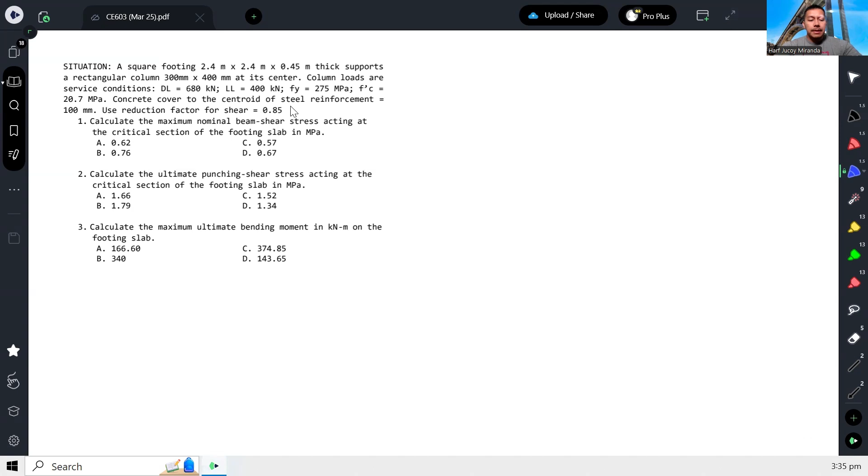In this particular problem, you have to notice that the reduction factor used is different, 0.85. This means the context is NSCP 2001, because in NSCP 2015, the reduction factor for shear is 0.75. So for this problem, we are using NSCP 2001.

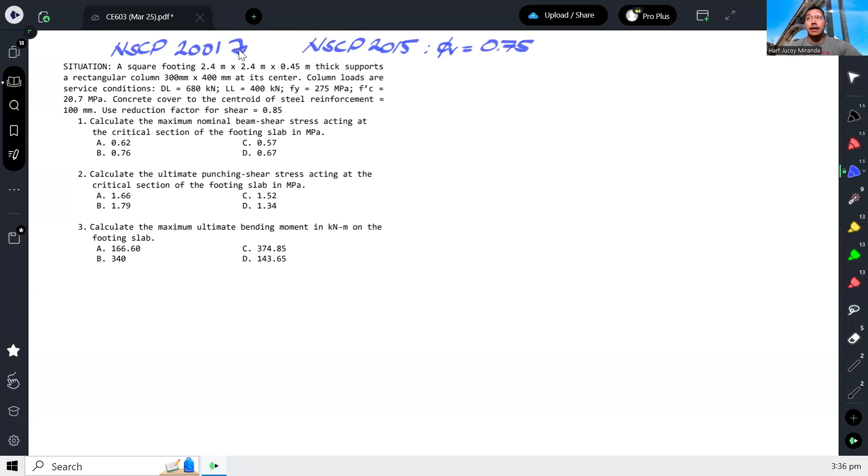The reason why I am still going from time to time back to the old code and the new code is because there are still questions in the board exam that pertain to the old code, so that we remain flexible.

Now, first question: calculate the maximum nominal beam shear stress acting at the critical section of the footing slab. Then calculate the ultimate punching shear stress, and then calculate the ultimate bending moment.

Because we are using NSCP 2001, our load combination would be 1.4 dead plus 1.7 live. In NSCP 2015, it's already 1.2 dead load plus 1.6 live load. Anyway, let's calculate first the ultimate load acting on the footing.

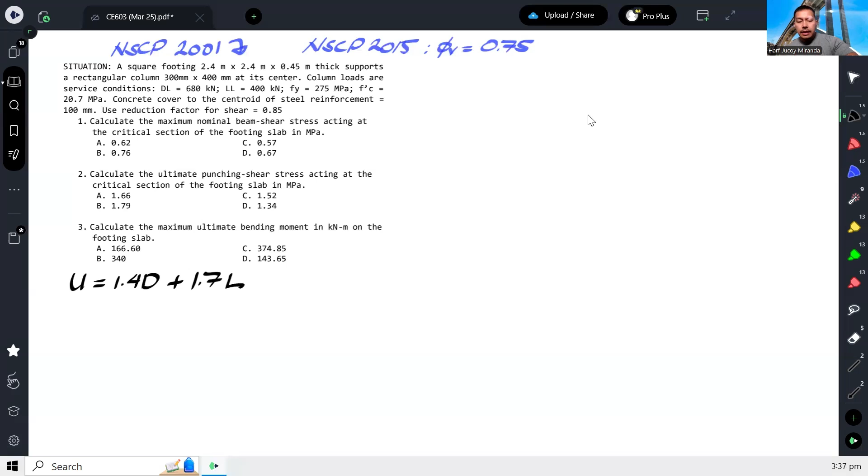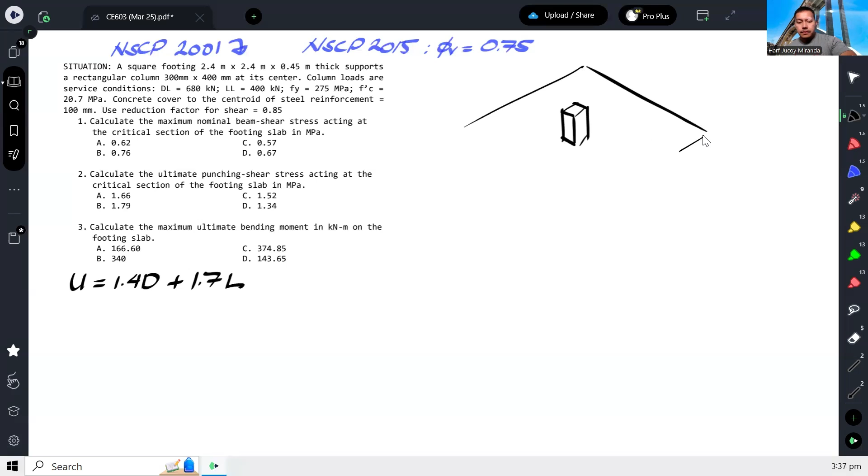So let's say this is the column, and this is the footing. Of course, there is an ultimate load acting on the column, PU. So let's calculate PU.

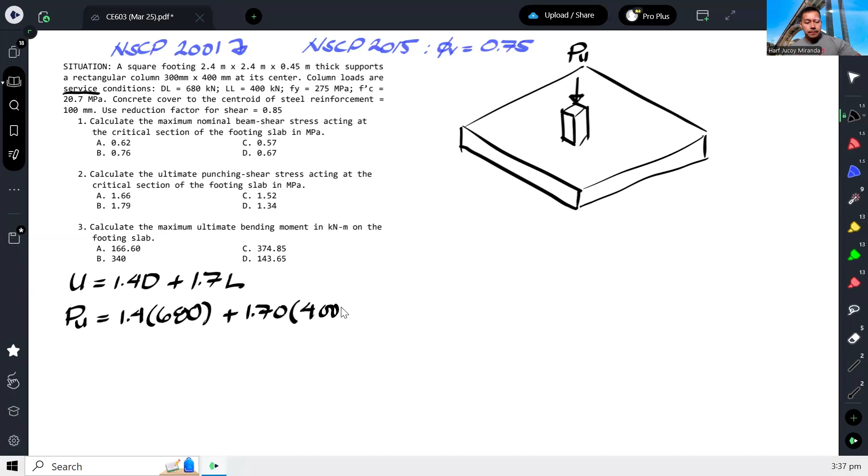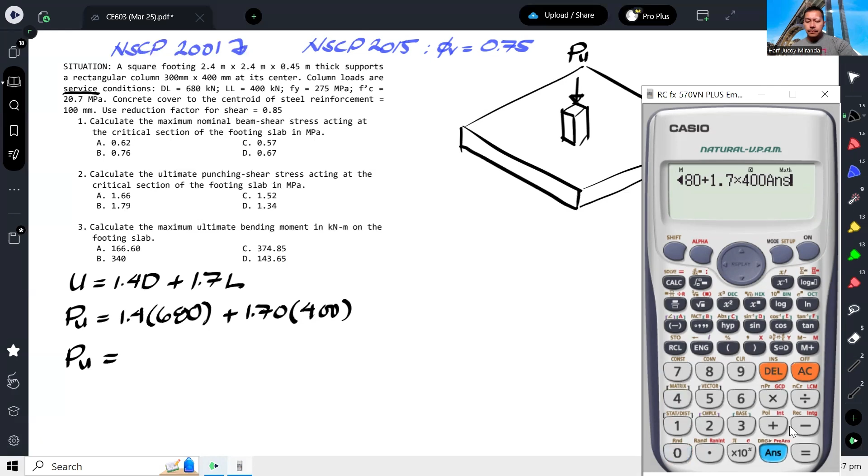PU is 1.4 of the service loads, since they are not yet factored: 1.4 times 680 plus 1.7 times 400. This is based on NSCP 2001. So 1.4 times 680 plus 1.7 times 400 gives us 1632 kilonewtons.

Alright, then we need the wide beam shear stress. The wide beam or nominal beam shear stress would occur at a distance from the face of the column. So if we look at the top view of our footing...

This dimension of our footing's column is 300 by 400, and then our footing is 2.4 by 2.4 meters. And we know that the critical section for beam shear stress is at a distance d from the face of the column.

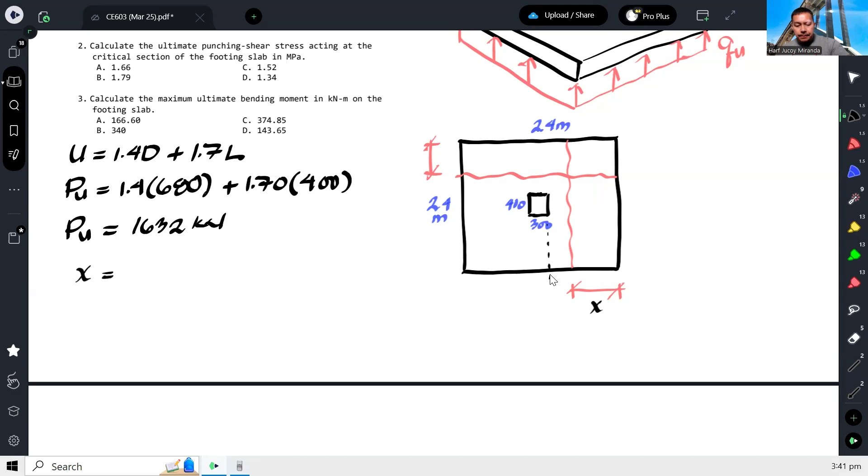Let's call it x. That x will be equal to... first, let's get the effective depth. The total thickness is 450, minus the concrete cover to the centroid of reinforcement, 100. So effective depth is 350.

So our x is 2.4, minus 300 or 0.3, then divide by 2, then minus the effective depth. So x becomes 0.7.

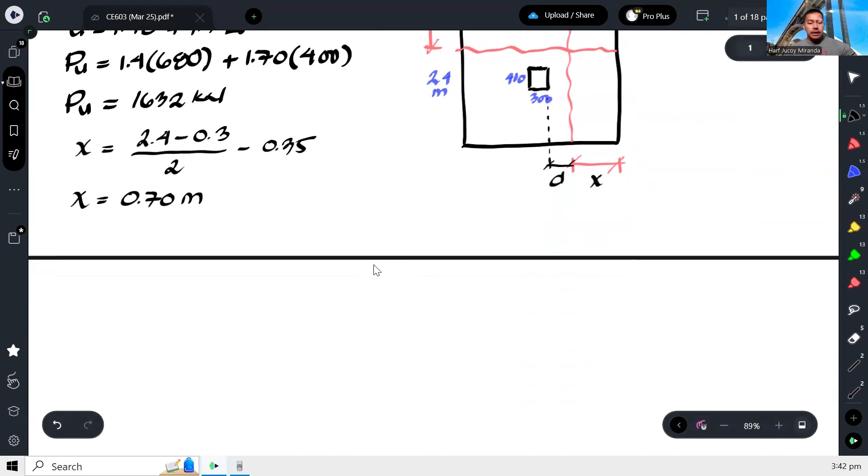So anyway, by getting this particular slice, we will now have a failure in this direction.

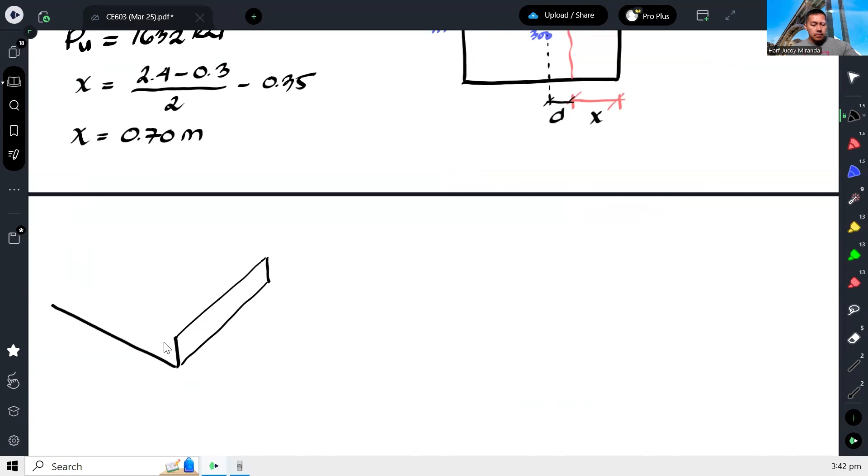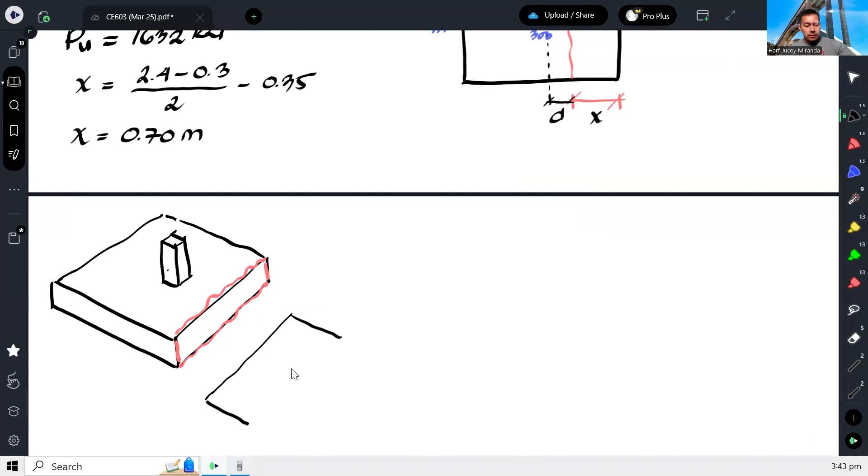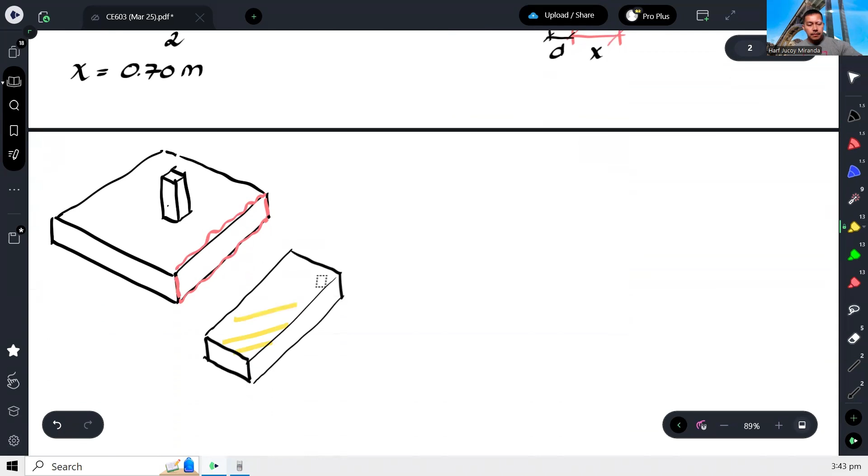Okay, so magkakaroon ng failure. So, itong part na to, nag-crack, no? Okay, so matatanggal to. Okay, so parang matatanggal itong part na to. Ito yan. Okay?

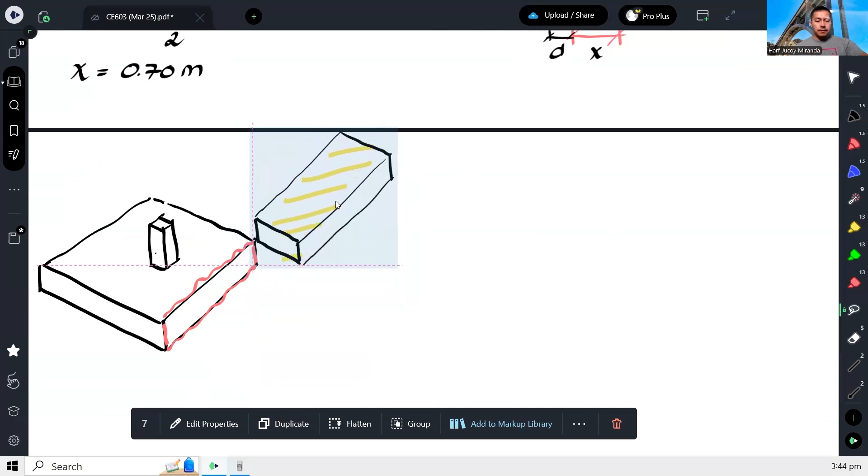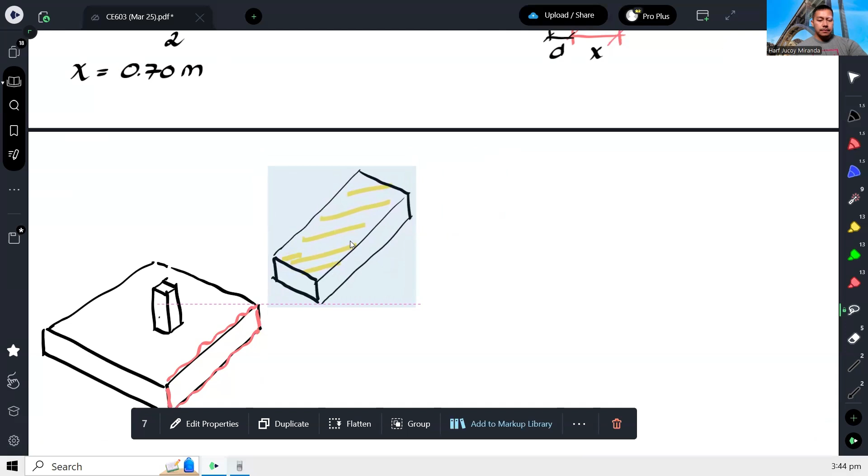So parang matatanggal ito, no? Okay, so parang maghihiwalay ito. Ito mahihiwalay dito. Okay, so naghiwalay sila dahil meron ditong soil pressure.

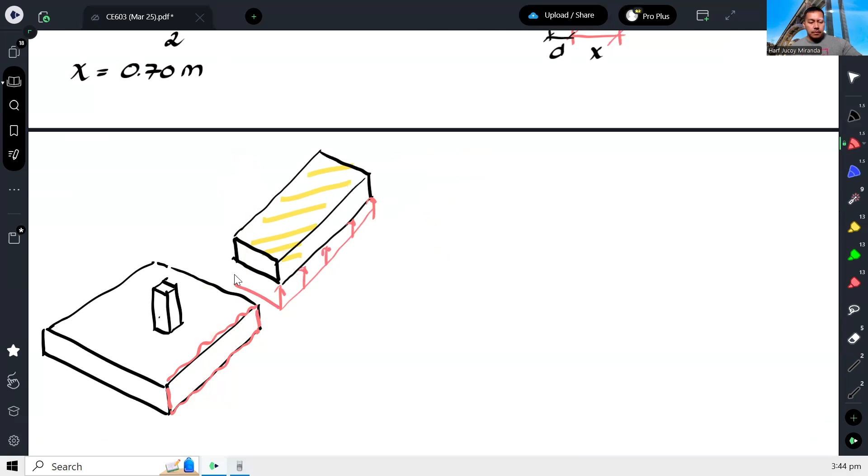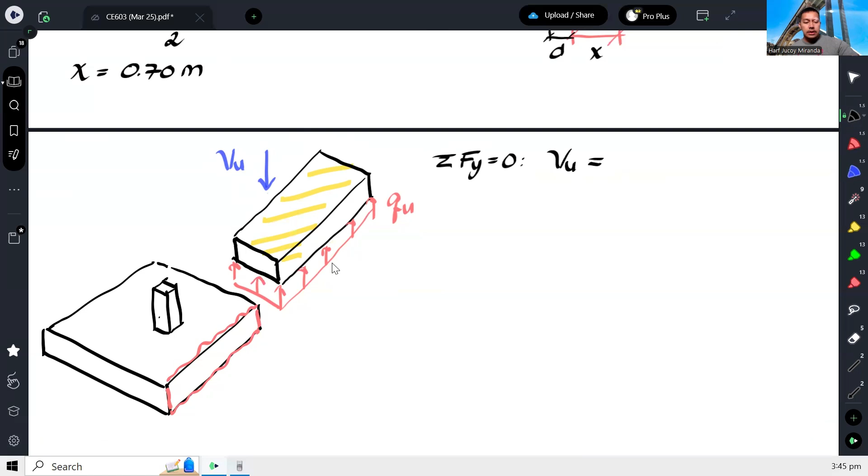Okay, QU. So basically, yung shear force acting doon, ito, kung ano man yung reaction niya dito. Okay, and yung shear force na kapag nag-summation ka lang ng forces para dito sa section na to, Fy is equal to 0. So lalabas lang dyan, yung shear force VU ay equal lang dun sa resultant nitong QU, which is QU times yung area dito sa ilalim.

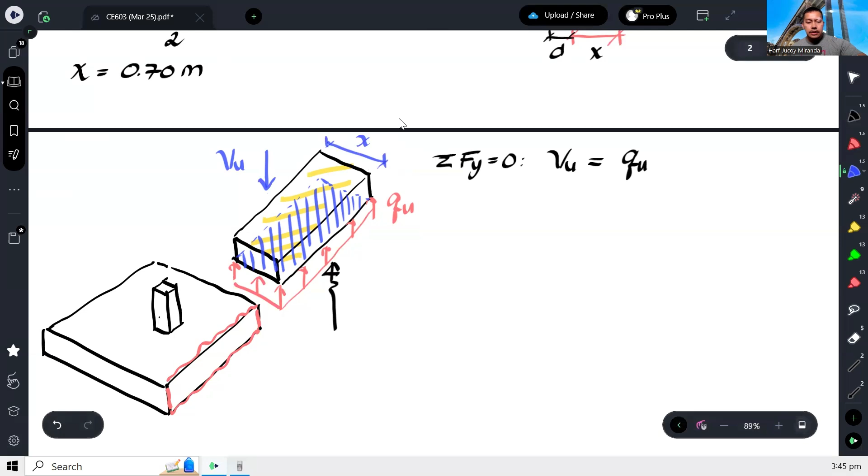Kasi di ba yung QU na yan, dito naka-act. Dito yan, naka-project sa area na yan. Okay? Wherein yung dimension na to, we already know that this is X. Ito yan. Okay, yung X na yan. Ito yan. Okay?

And then this length would be, that length is 2.4. Okay, so that would be 2.4 times X. Okay, so force na yan, no? So, therefore, ang VU natin will become, so kunin muna natin pala yung QU.

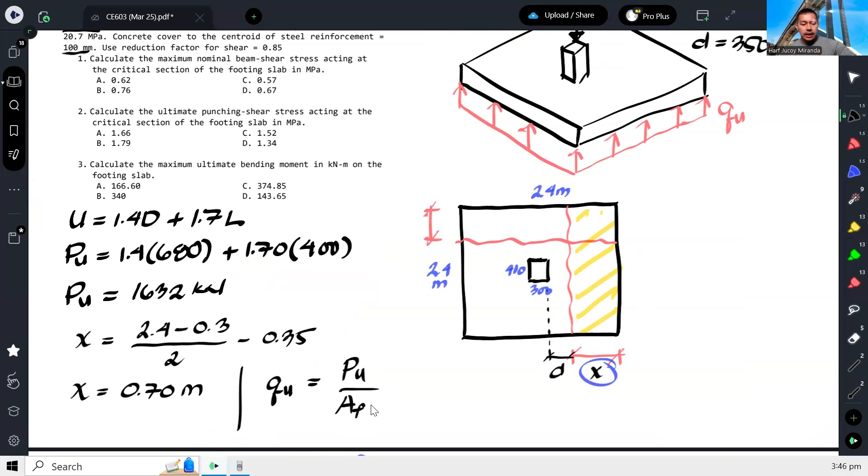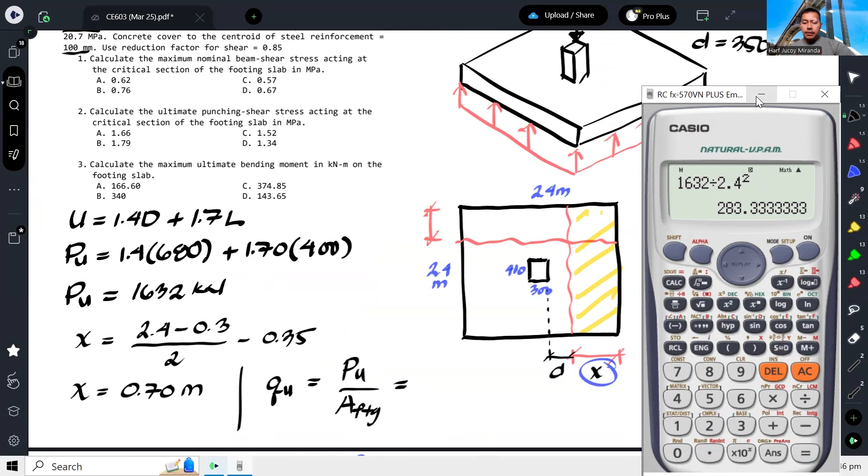Hindi ko pala na-compute yung QU. So, yung QU is just yung PU over area lang ng footing. Okay, and that gives us 1632 divided by area ng footing, 2.4 squared. Ayan, so 283.33 kilopascals. Store natin. Okay, so therefore, ang VU natin ay QU times 2.4 times yung X natin na 0.7. So, 476

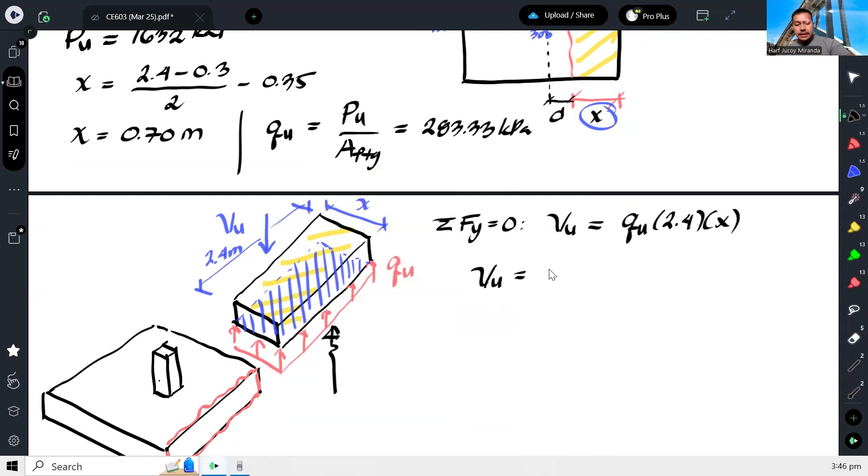kilonewton. So, now we are ready to calculate the beam shear stress. And that is VU over, so depende yan. Kung nominal, mayroon tayo dito ang reduction factor. Okay, so ito yung nominal. Kung gusto mo ultimate shear stress, no, VU over BD lang. Okay? Kasi ang mangyayari para maging ultimate yan, itong reduction factor, multiply mo dito, no?

Dito na siya. Okay? Pero dahil nominal, ito ang gagamitin natin. So therefore, ang FV natin would become VU na 476,000, gawin nating Newton, over 0.85. So itong B na to, tandaan nyo palagi, ito ay para sa akin, no? Para lang madali matandaan. Yan yung length ng crack. Okay? So ibig sabihin, I'm referring to this.

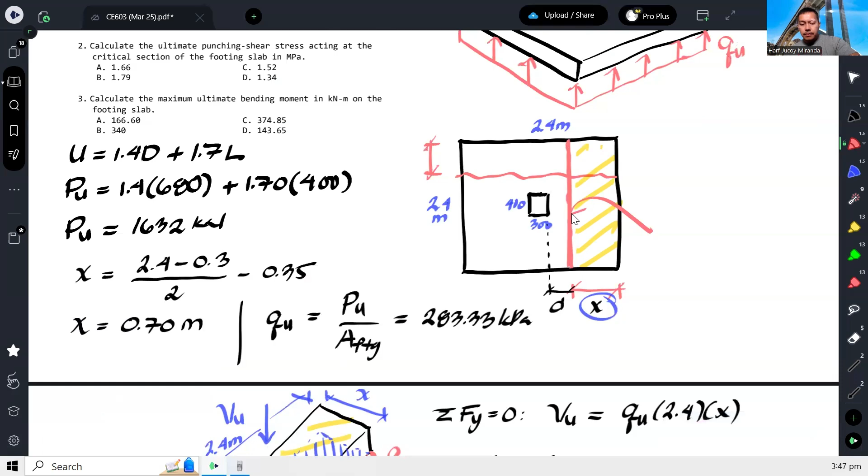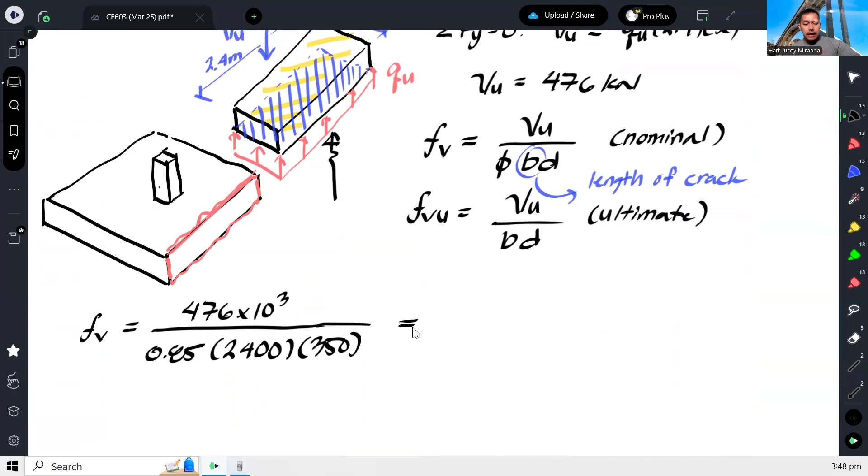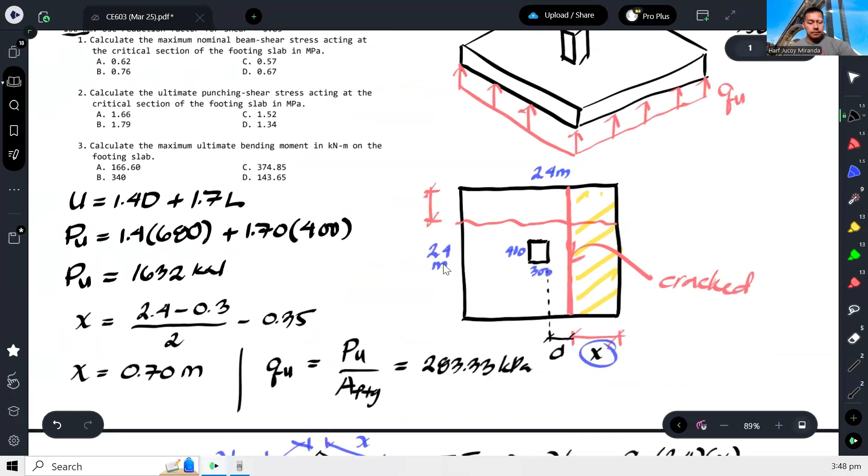Ito. Ito. Okay? So, ibig sabihin, yun yung B, 2,400. 2.4 meter or 2,400 millimeter. Tapos, effective depth is 350. Okay? And that gives us 0.67. Okay? So, that is our nominal beam shear stress.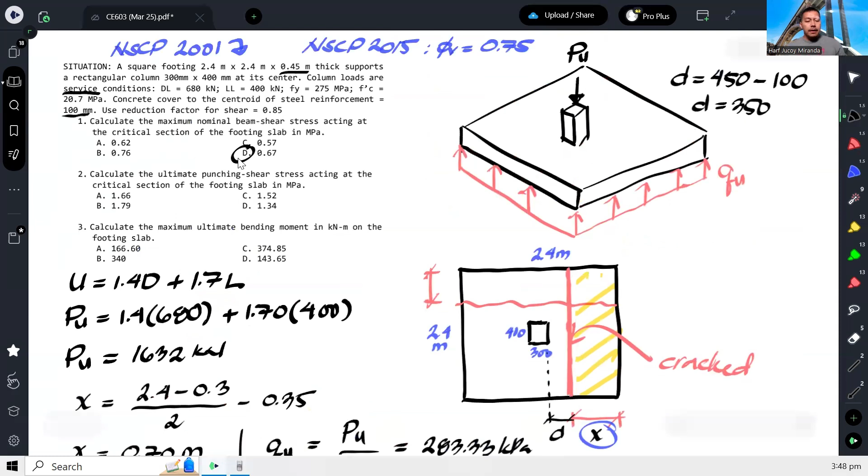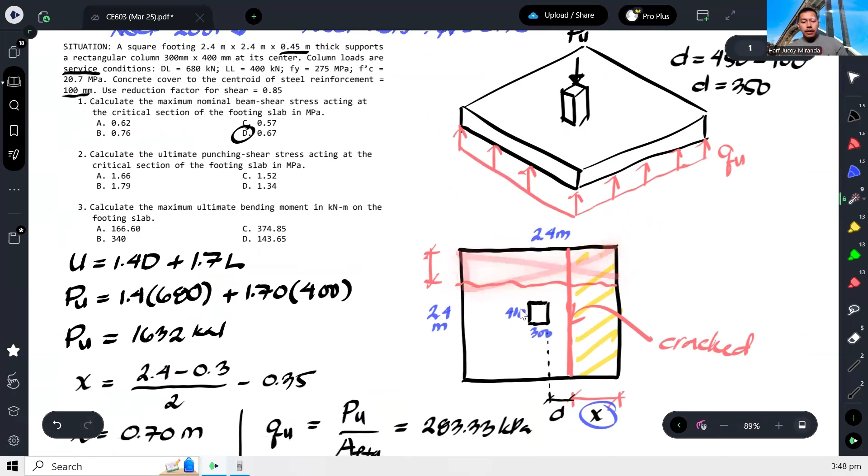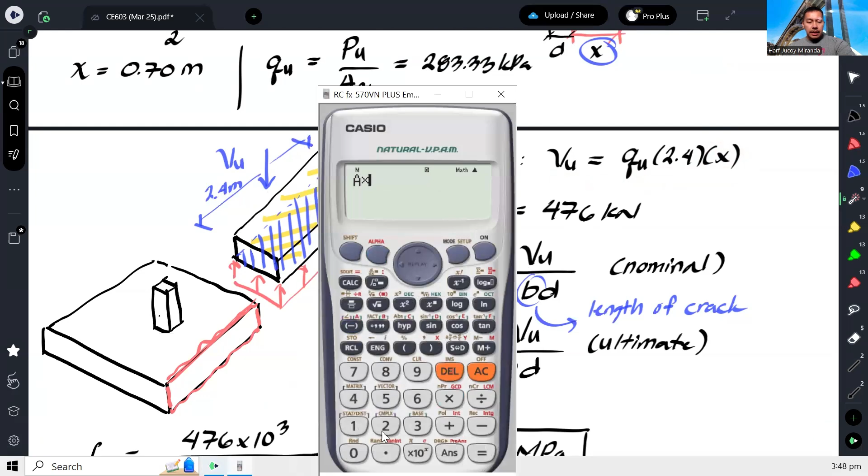Okay? Pakita ko lang na mabilisan. Paano kung ito yung kukunin ko? Okay? So, magbabago lang dyan itong X. So, bali, VU is equal to QU times 2.4 times ito. So, ito magiging 0.65. So, QU times 2.4 times 0.65. So, 442. As you can see, mas maliit.

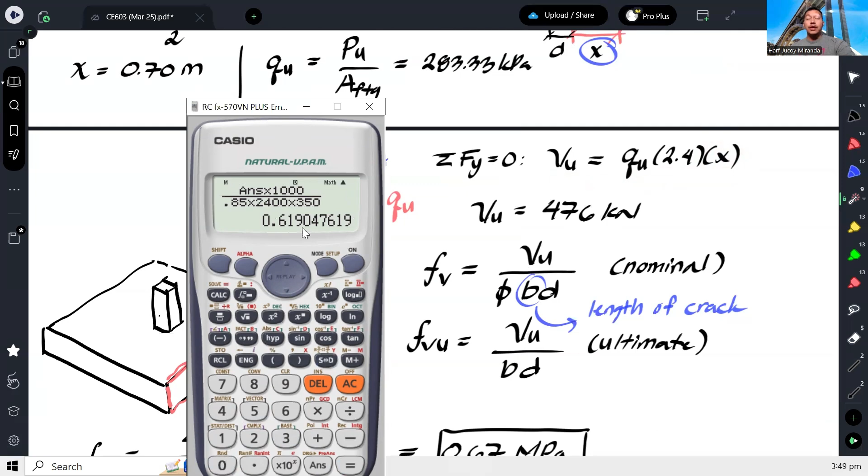No? Mas maliit siya dun sa 476. Kaya pag kinompute mo yan, 0.85, length of crack 2400 pa rin, times effective depth, ito pa rin. So, lalabas yan, mas maliit, 0.62 lang. Okay? At, ayun, nasa choices din yun. So, you have to be careful, no? Kaya kailangan mo mahanap yung mas critical.

Okay, next, number 2. Calculate the ultimate punching shear stress acting at the critical section of the footing slab. So, ang punching shear naman ay nangyayari at d over 2 distance around the face of the column. Okay? At d over 2 distance around the face of the column.

So, parang lumalabas, ayan, ito ay d over 2. Pati itong kabila. Actually, d over 2, pati dito. Di ba? D over 2. And so on, no? So, ibig sabihin, if we would draw the punching shear,

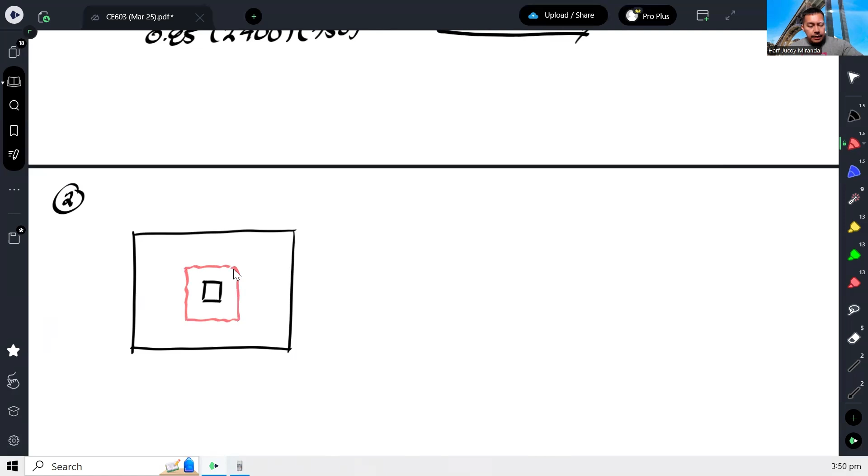ito yung column. So, ito naman yung magiging crack niya. Ayan. Okay? So, therefore, ang dimension nito will be, di ba 300 yan? 300 plus d over 2 sa kaliwa, d over 2 sa kanan. So, plus d lang. Pati sa kabila, ganun din. 400 plus d. Kasi d over 2 sa itaas, d over 2 sa ilalim.

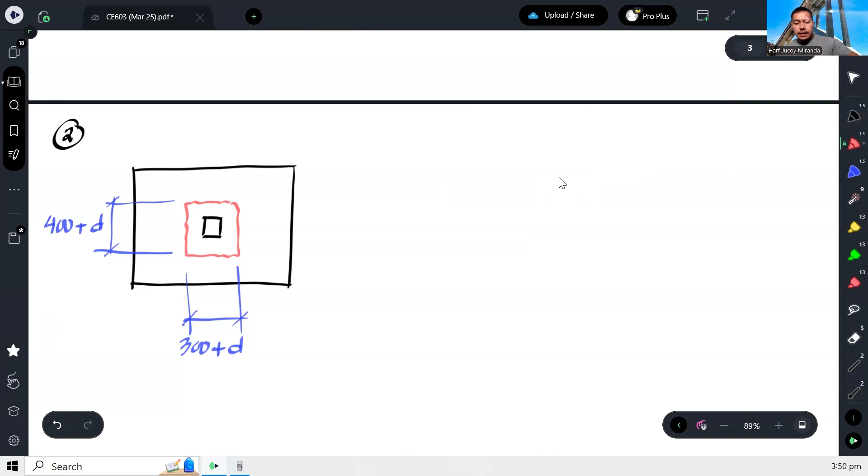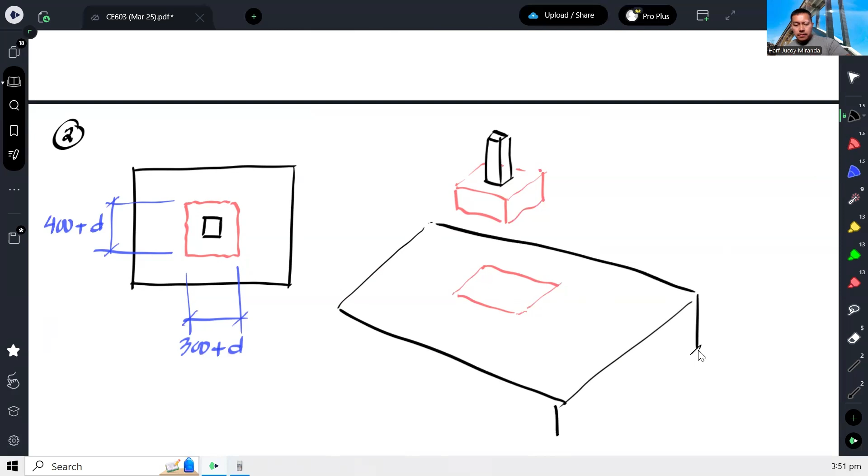Okay? So, ibig sabihin, pwede natin yan i-isolate yung magka-crack na yan. So, pwede na parang ganito ang mangyayari. Parang hihiwalay ito. So, ito yung column. Yan, hihiwalay ito dito. So, parang hihiwalay yun, no?

Okay? So, dito dalawa yung ano natin, option. Tanggalin ko na to. Lipat natin dito, no? So, dalawa yung option natin. Pwede nating i-analyze ito or pwede mo itong i-analyze. Okay? So, ang goal mo palagi dyan, hanapin yung magiging shear force acting dito sa ano na to, sa cross-section na yan or dito. Pares lang naman to. Okay? Hanapin yung shear force. So, kung ito yung analysis natin, so syempre meron tayo ditong PU, tapos meron tayo dito sa ilalim na QU.

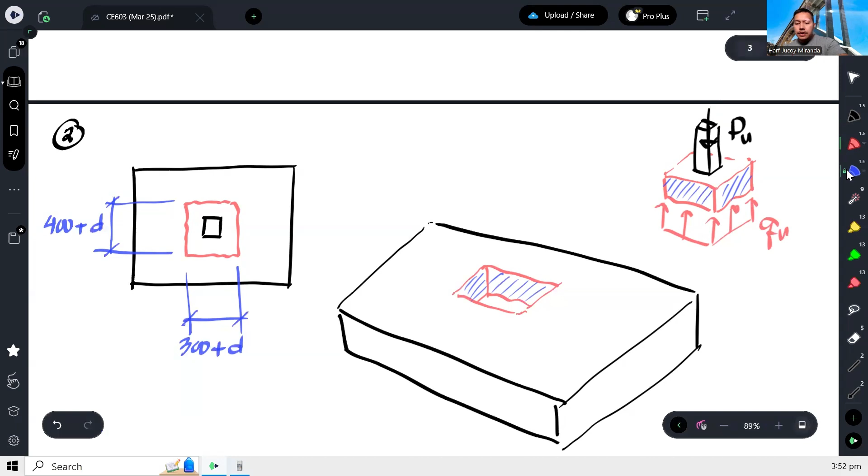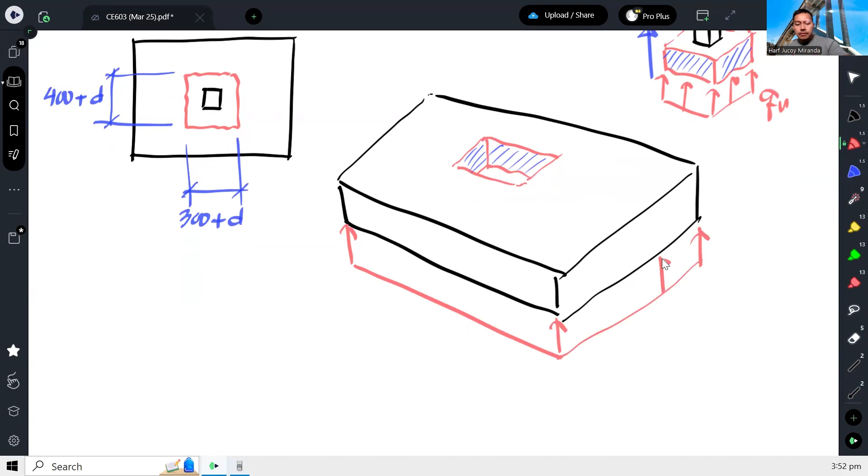Yan, kukunin natin QU sa ilalim. Okay, so yung shear force dito, ito. Kung ito naman yung analysis natin, itong sa baba, ito naman yung QU natin. Okay, and dito wala yung PU. Kaya ang kukontrahin lang dito ng section na to ay yung resultant ng QU. So actually, pwede tayong mamili. Pwedeng ito yung analysis, pero ang mangyayari dyan, same lang yung VU na mako-compute mo. Okay, dapat same lang.

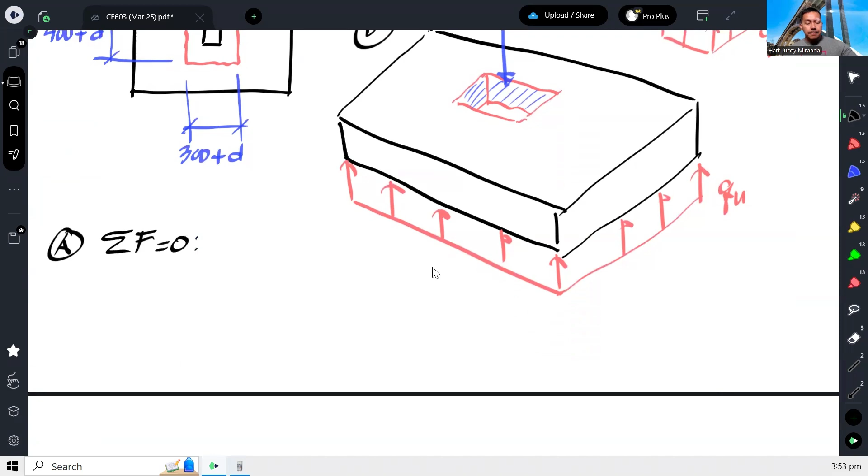Okay, normally ang ginagawa ng karamihan itong pangalawa kasi mas madali ito. Pero pwede rin naman 'to. Pakita natin both. So let's say ito yung solution A, ito naman yung solution B to calculate for VU. Kung doon tayo sa solution A, syempre magsa-summation of forces ka. So yung VU mo will be equal to PU minus yung resultant ng QU.

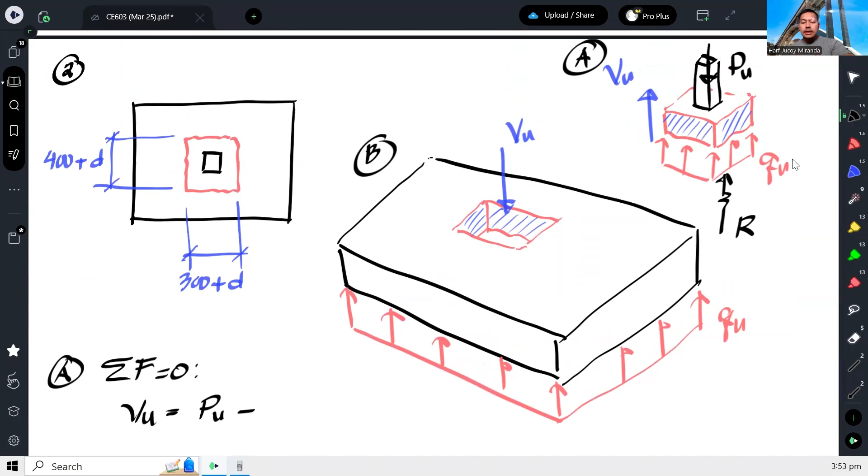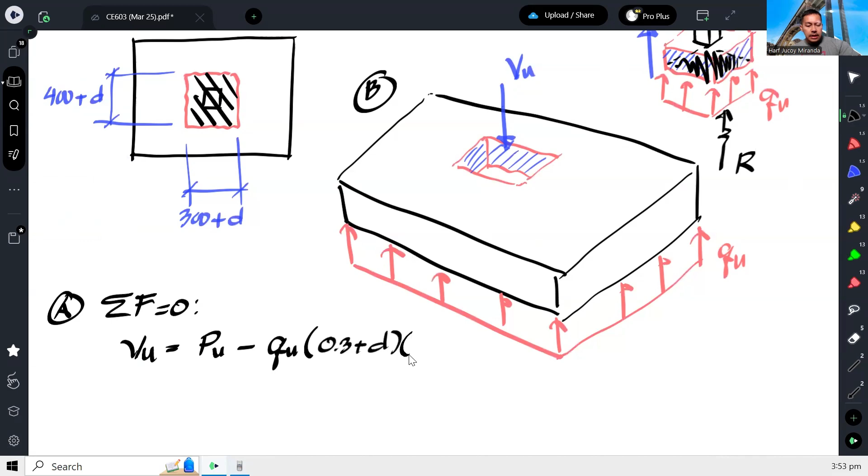Okay, yung resultant yan, kagaya kanina, that's QU times yung area niya sa ilalim kung saan siya naka-project, yung area sa ilalim. So that would be QU times yung area na yun. So ibig sabihin, 300 plus D, gawin nating meter. So 0.3 plus D times 0.4 plus D. So ganyan yung mangyayari. Okay, so kunin natin.

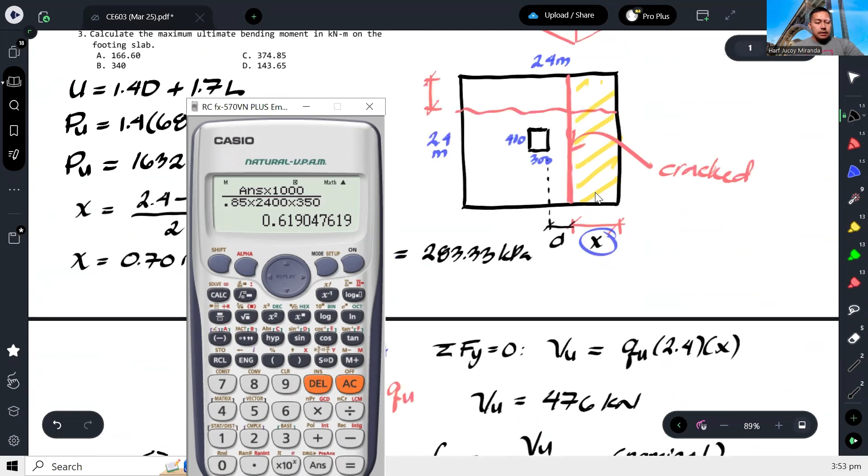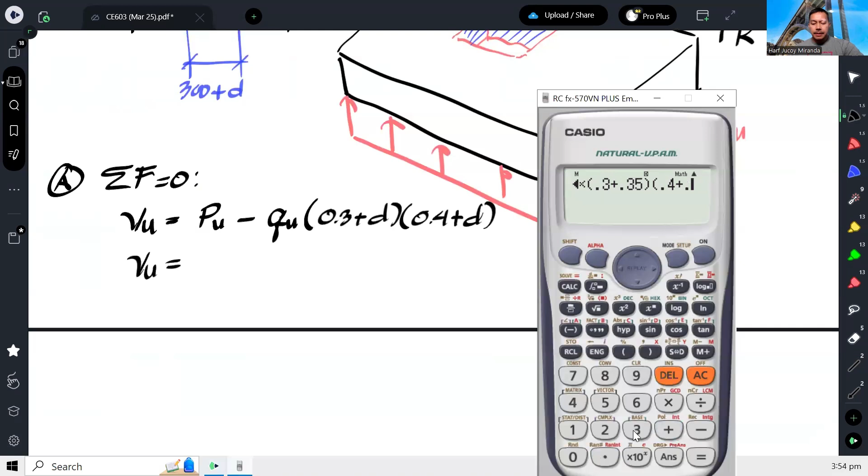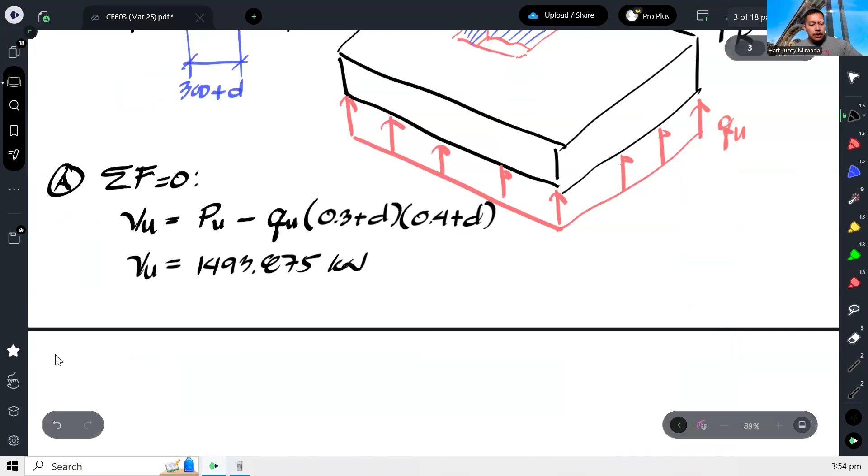The PU was 1632 minus QU, nakalagay ako sa A, times 0.3 plus effective depth, 0.35, times 0.4 plus effective depth. So that gives me 1493.875 kilonewtons. Kung ang style ko itong pangalawa, ang VU will just be equal to the resultant.

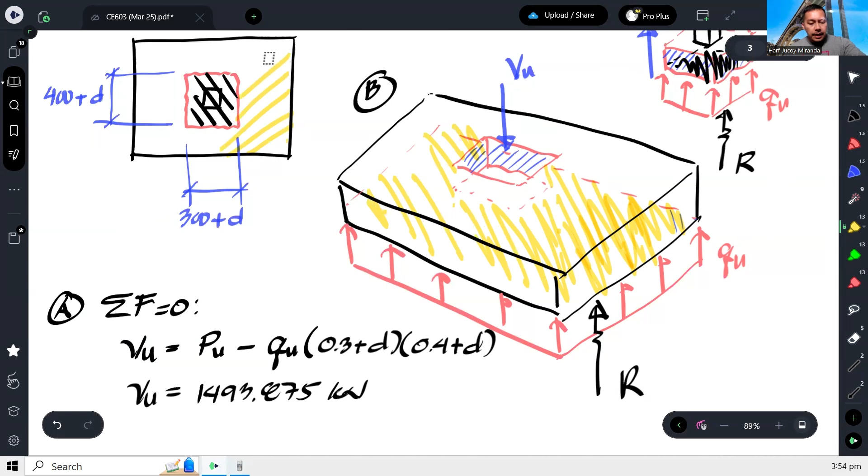Resultant nitong lahat ng to. Okay, and saan ba nakaproject yung ano natin dito ngayon? So bali dito po. Okay, so dito bali. Dito. Okay, so basically dito po, hindi kasama yung butas, syempre, kasi natanggal na yan eh. Dito, yan, dyan.

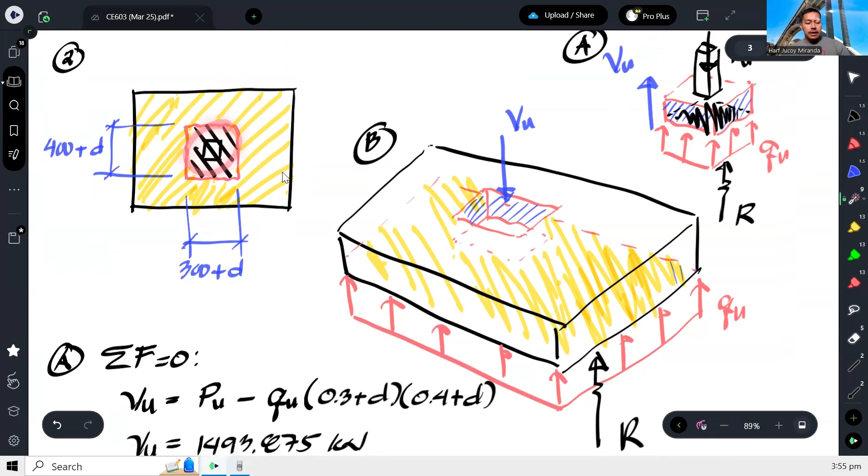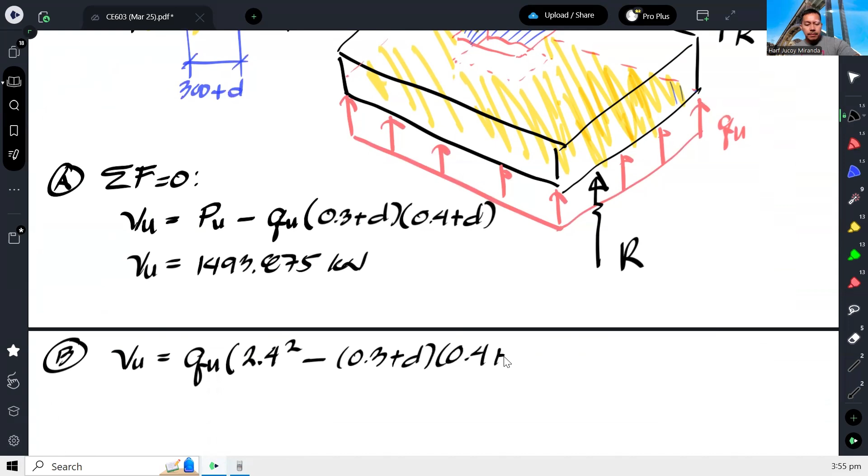So basically, yung area na yon is yung area ng buong footing minus yung area nitong binawas natin sa gitna. Ito. So which is QU times 2.4 squared minus yung area na yon, which is ito rin yun, 0.3 plus D times 0.4 plus D. Ayan, so as you can see, medyo mas maiksi siya, pero parehas lang naman. Hindi naman ganoon kalayo yung diferensya nila. So 2.4 squared minus 0.3 plus 0.35 times 0.4 plus 0.35.

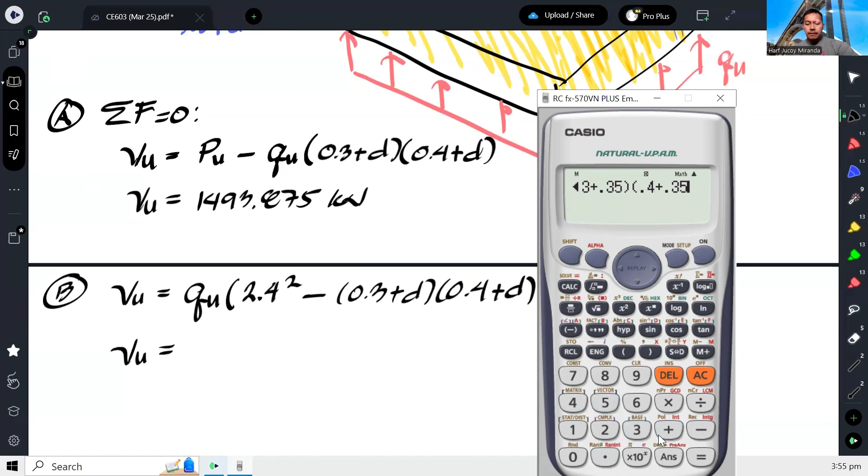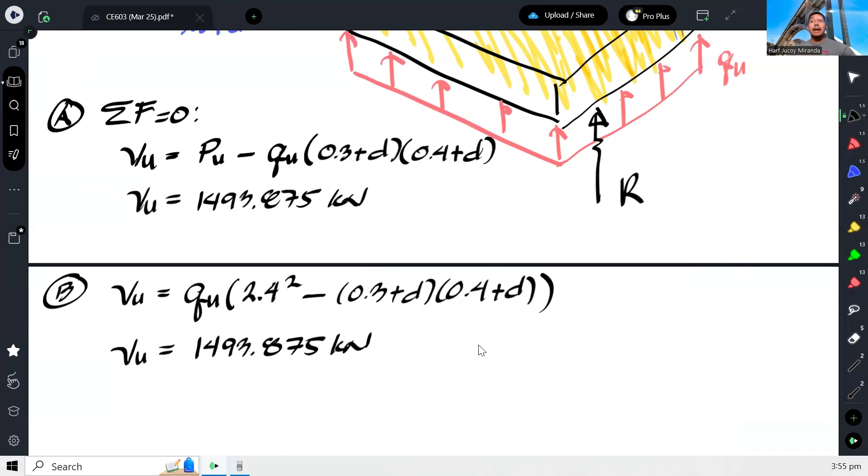So dapat parehas yan. Ayan. Okay, so 1493.875. Okay, so pinakita ko lang parehas ha, pero syempre sa inyo, isa lang gagawin nyo. Kung ano lang yung mas gusto nyong mas komportable kayo.

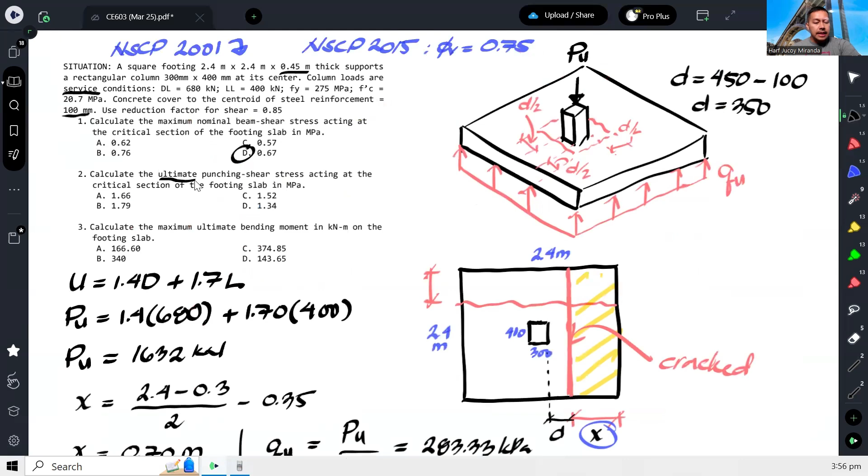And then lastly, we can now calculate the shear stress, punching shear stress. So again, ang nominal natin ay VU over phi BD. Okay, nominal tayo, so that we have 1493. Tama ba? Nominal yung tinatanong, na-check lang natin. Hindi nominal, ultimate ang tinatanong. So kung ganon, wala tayong phi dito. Okay, ultimate ito. So 1493.875 times 1,000 para maging Newton. Again, ito ay length of crack.

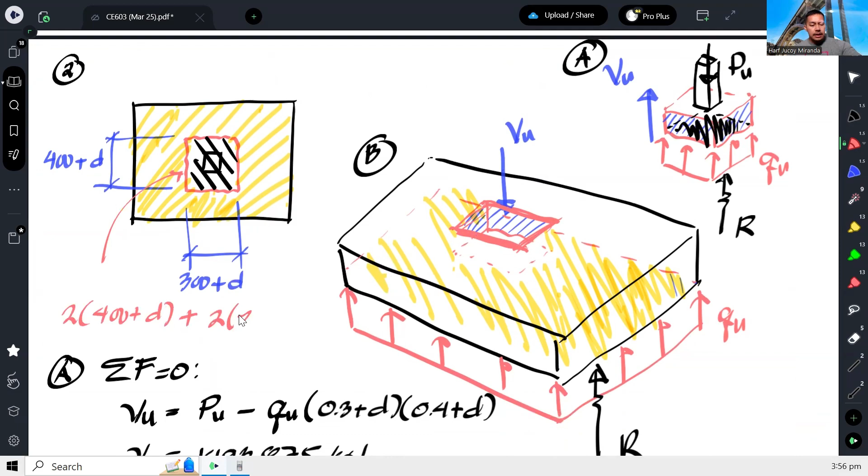Okay, so saan yung length of crack? Ito. Bali yung perimeter na ito. Okay, so anong perimeter niyan? So yung length of crack would be dalawang 400 plus D plus dalawang 300 plus D. Yun yung length of crack.

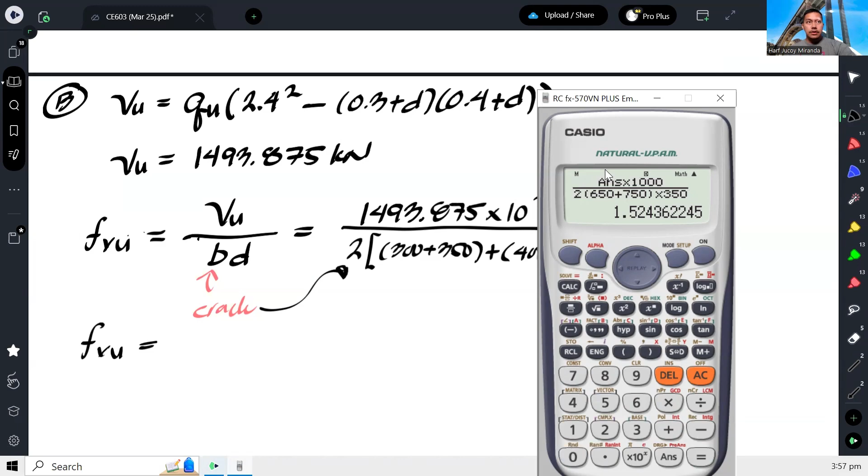So we have, pwedeng ganito lang, 2 times 300 plus 350 plus 400 plus 350. Yan yung B. Tapos times D na 350. Okay, so that gives us the ultimate punching shear stress, 1.52 megapascals.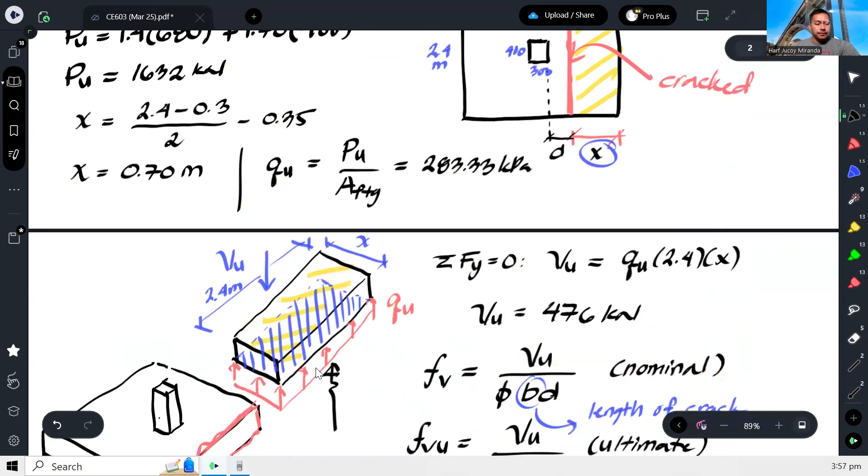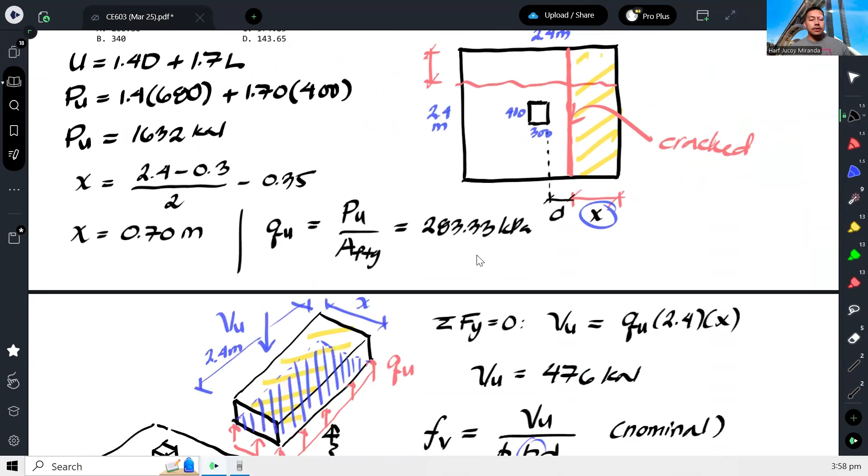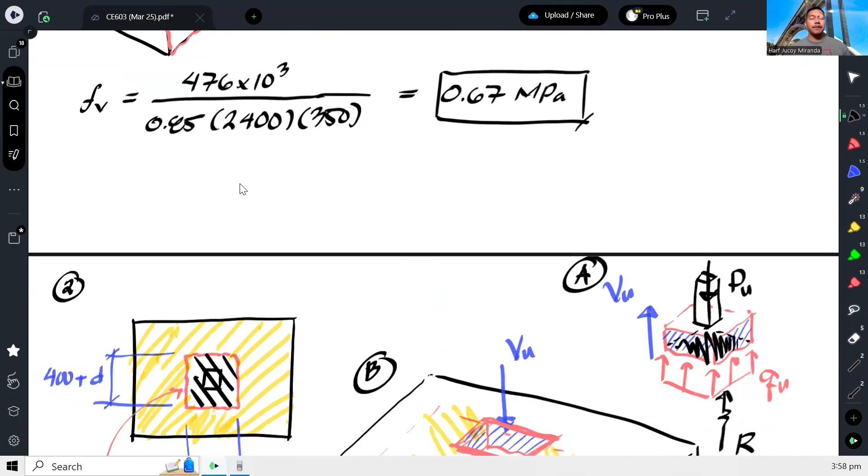So that is letter C. Next, calculate the maximum ultimate bending moment on the footing slab. So the critical section for flexure kapag footings ay nasa face ng support, nasa face ng footing mismo, rather, nasa face ng column mismo. So, ganun ulit for number 3.

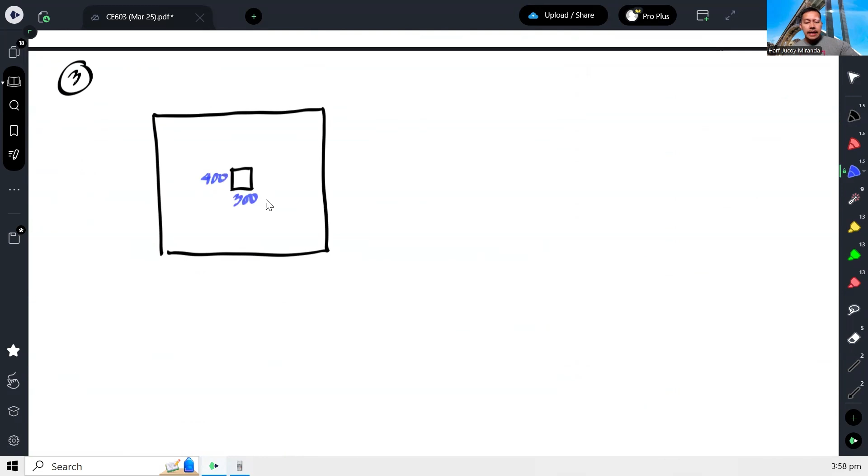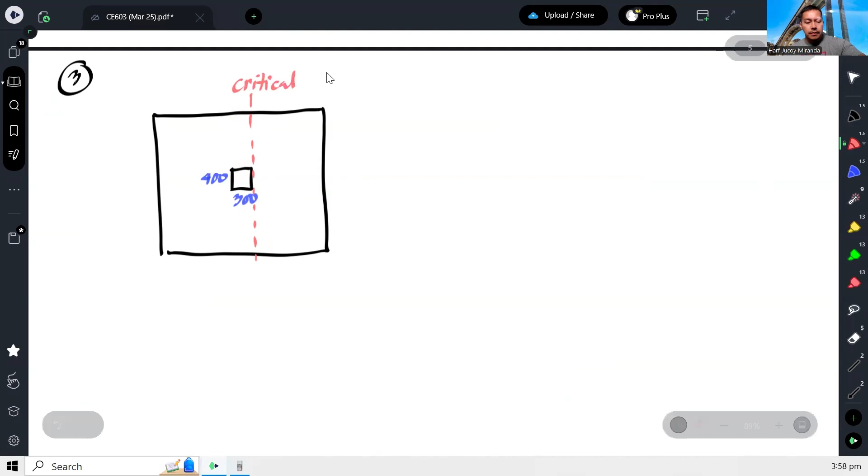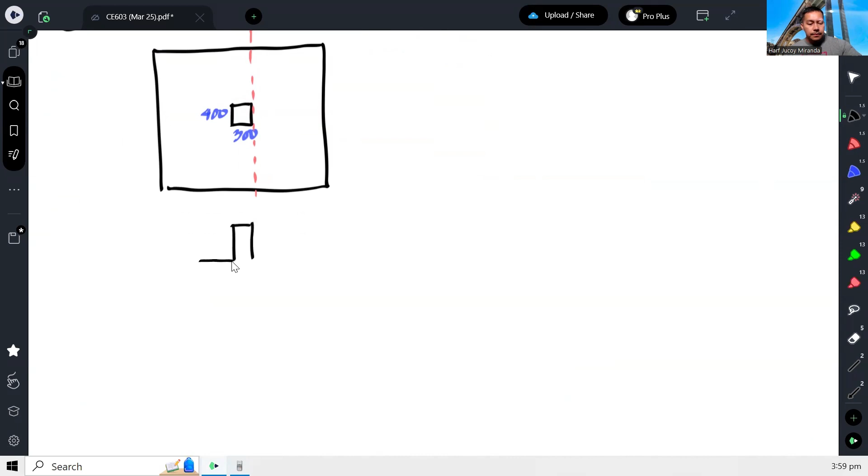Okay, ang idea ulit dito is kailangan mong mahanap alin yung mas mahaba. Na-establish na natin na ito yung magiging mas mahaba, compare dito. Kaya dito magiging critical yung flexure, dito yung critical section for flexure. Okay, so mangyari sa footing natin ngayon, kapag dinignan natin sa view na to, di ba may Pu, tapos merong reaction yung soil. Dahil sa reaction ng soil na yan, ito yung critical section natin, ang tendency ng footing ay magganto, para siyang mag-bend ng cantilever. So ang kailangan lang natin hanapin, ano yung moment dito?

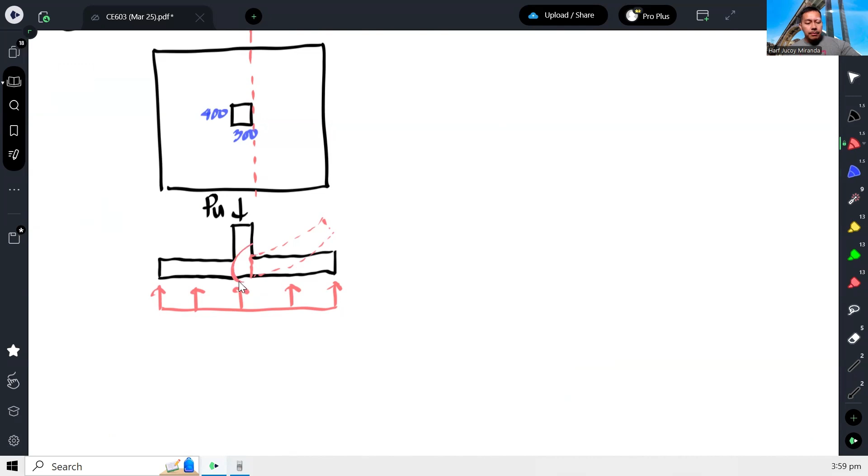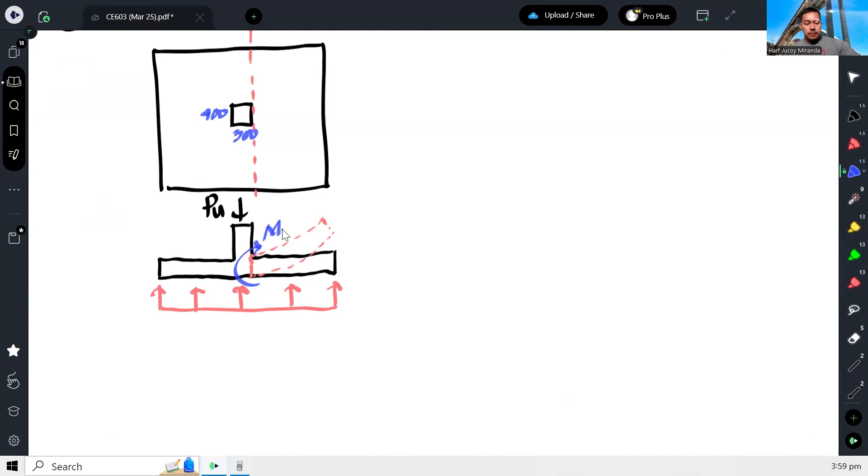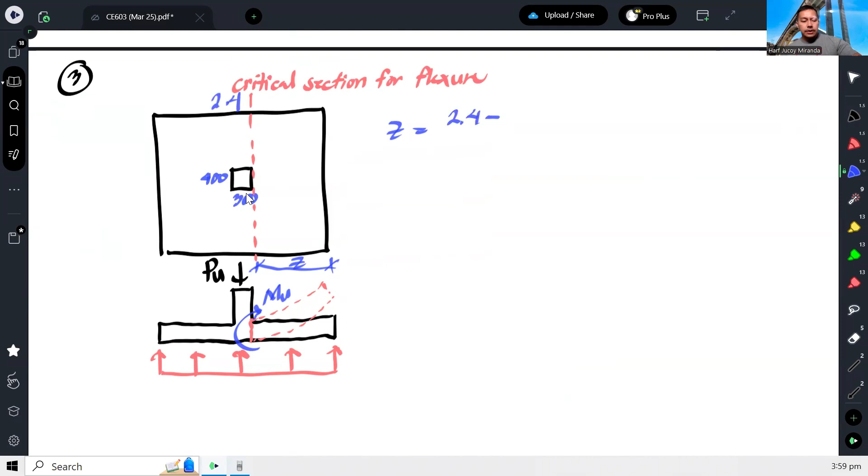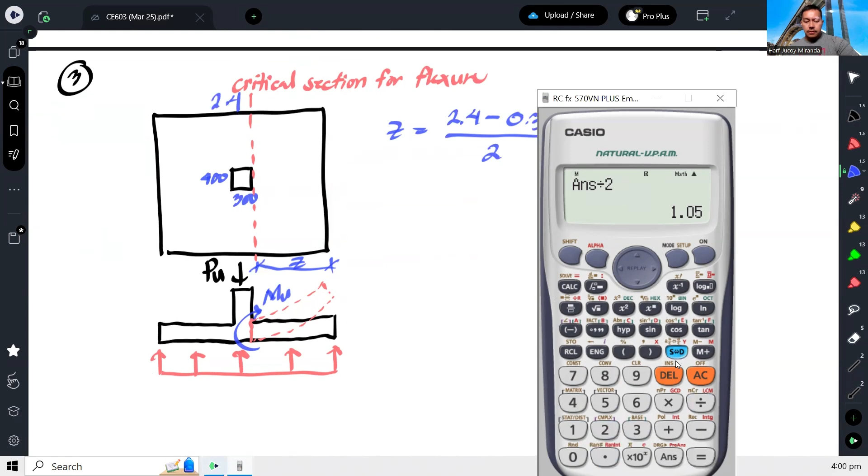Okay, ano yung moment yun? So para makuha yung moment na yon, kailangan muna natin itong sukat na to, tawagin natin na Z. So yung Z na yan is just, di ba 2.4 to? It's just 2.4 minus yung 0.3 over 2. Yun lang yun. That gives us 1.05. So, ibig sabihin, para siyang cantilever na ang sukat nito is 1.05.

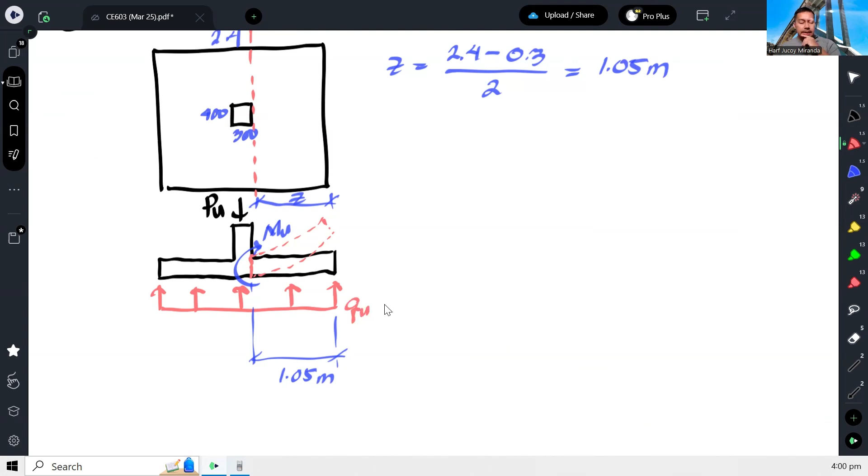Okay, so ito yung QU. Alright, so therefore, yung moment, ultimate bending moment lang naman, moment lang natin. So wag nyo lang kakalimutan na meron pa tayo ditong length na 2.4. Okay, so yung QU, para maging force, mumultiply mo dun sa 2.4 tapos dito sa length na to. Kumbaga, i-multiply natin tong QU sa area na to para maging force siya, kagaya ng ginagawa natin kanina sa VU. So para maging force, tapos mag-a-act yan dito sa gitna. Ito naman yung moment arm niya. So dito siya mag-a-act yung resultant niya, so ito naman yung moment arm.

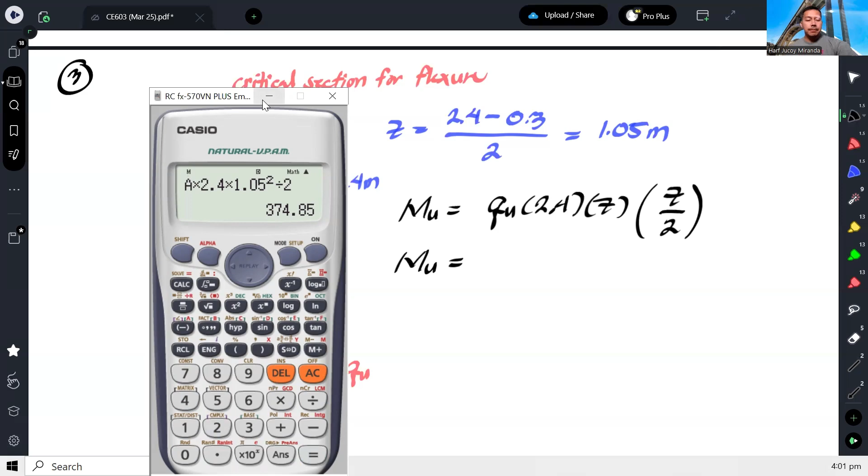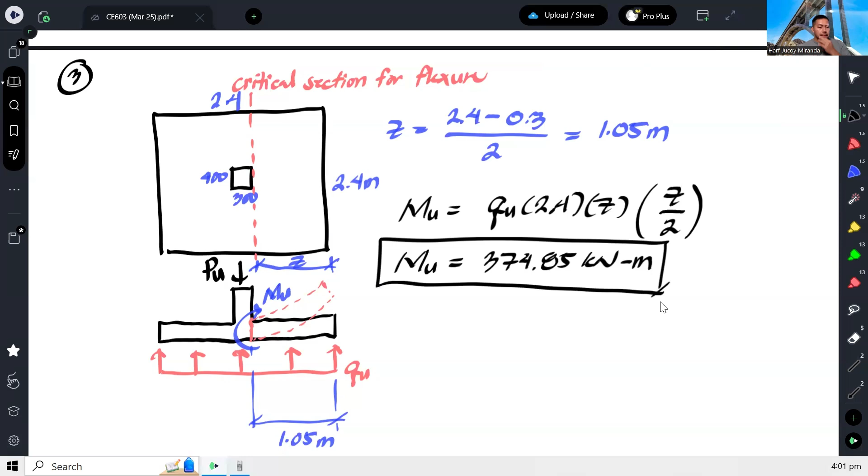Okay, so we have MU is equal to QU times 2.4 times yung Z times yung moment arm ay Z over 2. Okay, that gives us 374.85. Okay, so for number 3, that is letter C. Okay, and that's how we solve this problem.